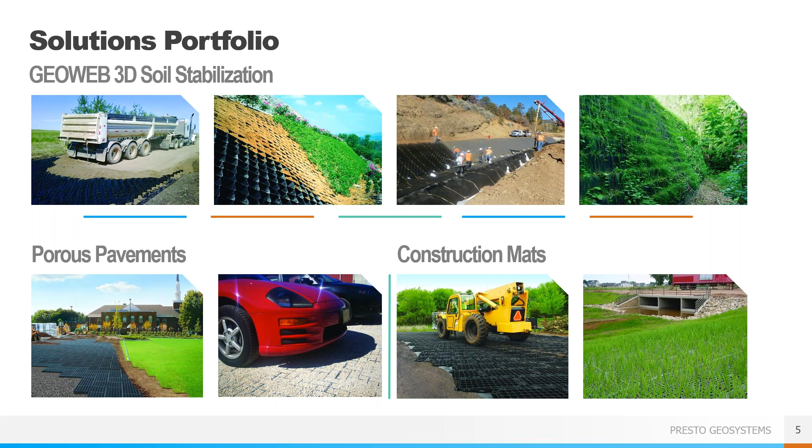An important thing to keep in mind as we go through this webinar: the trails that are made with our products are all considered permeable trails. That is, there's no impermeable paved surface being placed. The final surface is going to be a stone or sand material. This lessens the environmental impact of the trail, reduces the amount of heavy equipment required for installation, often in difficult to reach locations, and improves the overall cost and speed of the project.

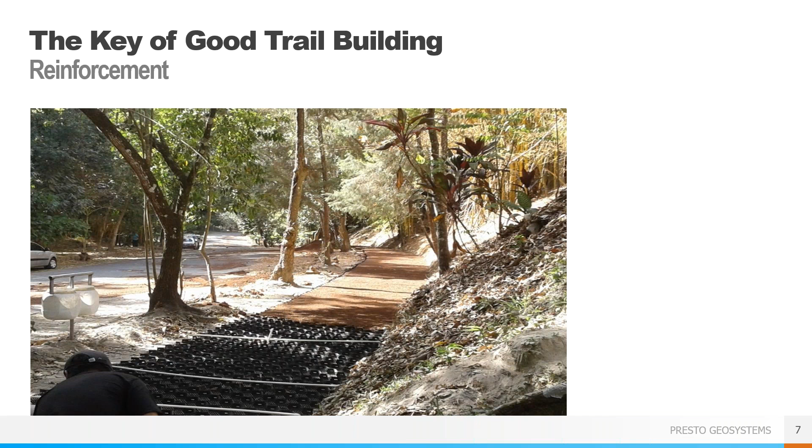We'll begin with what makes a good trail. The first aspect of the design is the reinforcement of the trail area. Especially when the trail moves through sensitive areas, keeping the path intact is how you keep people away from damaging vegetation or getting lost while wandering. The trail needs to be clearly delineated and needs to be reinforced enough to stay in place over time. Using products specially designed to act as the reinforcement of the soil or stone means the trail will last longer and will not encroach on the surrounding environment.

The next key to a well-designed trail is drainage. Ponding water can ruin a trail's surface, and water that runs off the trail into unreinforced areas can scour and damage those areas. As I mentioned, all the products from Presto are considered permeable, and it is precisely for this reason. By keeping the surface permeable, the water infiltrates at the point of contact right when it hits the trail. The water can then permeate down through the product and into the subgrade, entering the groundwater system. The water won't pond at the surface, and it won't run off or collect outside the reinforced areas. This keeps the trail in the same condition, no matter the weather, so there won't be any flaws or failures created below the surface that you can't see.

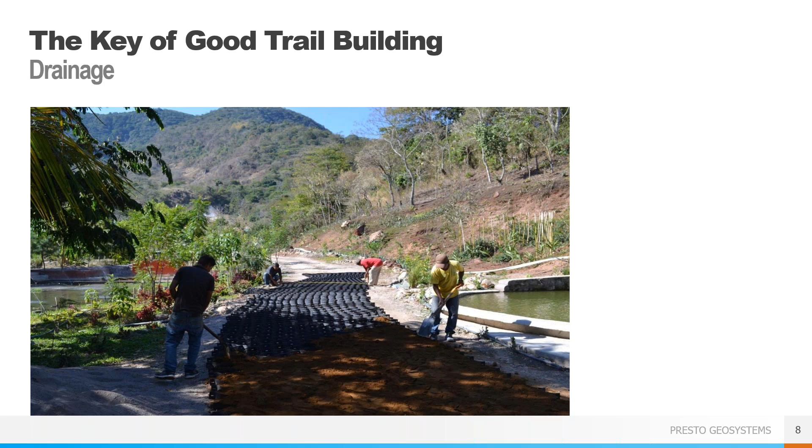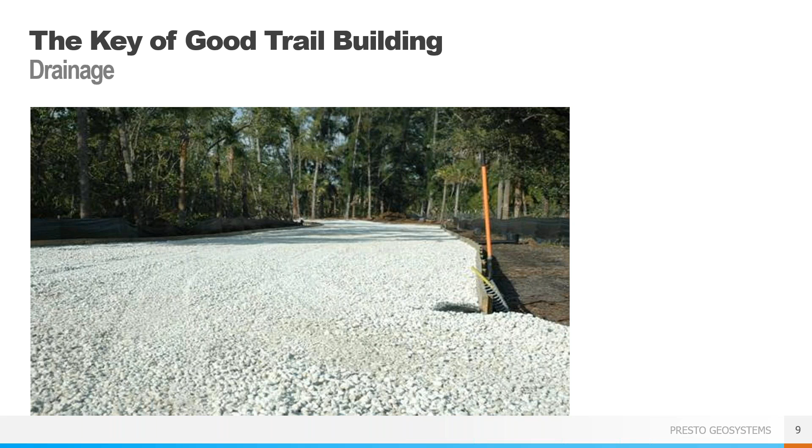The last thing to consider when designing a trail is how to confine the surface. Loose aggregate, stone, or sand is easily moved under shoes, hooves, tires, and water, leading to ruts, holes, and generally damaged trail areas. When the trail surface is damaged, people are going to want to move around the damage, leading them off the trail and into unprotected areas, potentially disturbing sensitive environments. Keeping the surface in place is an important feature of the products from Presto. When the stone or sand is properly held in place, ruts cannot form and the material can't be washed away. This greatly reduces the amount of maintenance required because the trail surfaces aren't degrading.

The first product we'll look at is the GeoWeb three-dimensional soil confinement system. This is a geocell, which may be a term you have heard before. It is similar to a geogrid, but is three-dimensional, so it has depth to provide true confinement and can be used in a wider variety of applications.

The GeoWeb system consists of two main components: cell size and cell depth. The cells come in three sizes, roughly 8 by 10 inches, 11 by 12 inches, and 18 by 20 inches, and heights of 3, 4, 6, 8, and 12 inches. The combination of cell size and depth depends on the project details and loading requirements, but generally trails will use a 4 or 6 inch depth and a small or medium-sized cell.

The seam strength is very important to the function of a geocell. The stronger the seam strength, the better designed the geocell is. A strong seam allows for heavier infill material, steeper and taller slopes, and better lifetime performance. The strength of the panel material, in our case high-density polyethylene, is also critical to the strength and performance of the geocell material.

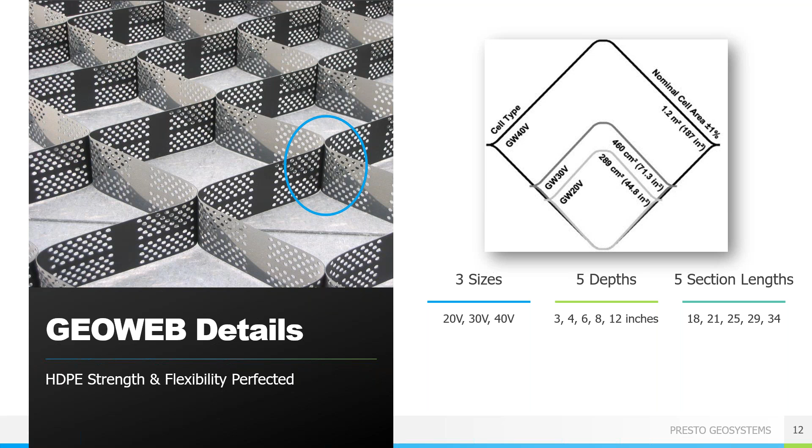Here you can see a typical GeoWeb panel. It comes tri-folded and palletized. Each section has a nominal width of 8.5 feet with lengths up to 58 feet. The panels are flexible, opening like an accordion, so they can follow the natural contours of the work site without being confined to a rigid set of dimensions.

A general note when reviewing product spec sheets for geocells, and any geosynthetic product for that matter: you want to pay close attention to any disclaimer language a product provider tries to sneak into the fine print. Recently, we've noticed a concerning trend where low-end product providers present performance data that appears to equal industry accepted standards on the surface, but then add disclaimer language stating that their specifications are subject to change without notice, or that the information shown is for general purposes and not intended for design. Watch out for this type of trap, especially if a contractor asks you to evaluate a substitute product.

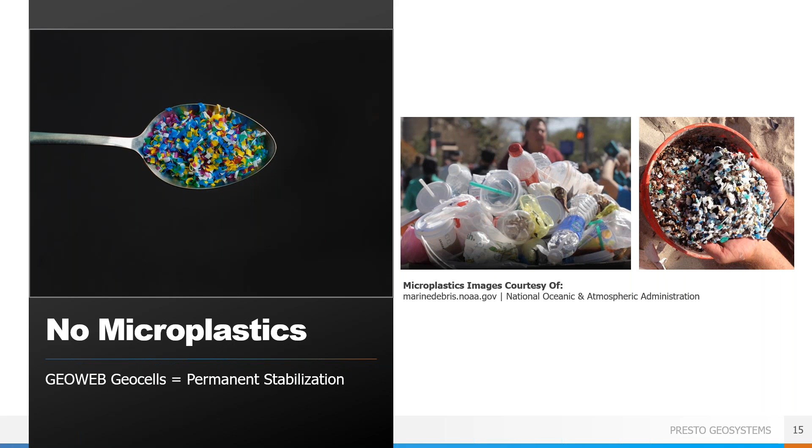GeoWeb is manufactured with premium high-density polyethylene resin with no fillers, polymer alloys, or stabilizers. Our base resin is the same material used in environmental applications, such as geomembranes or other environmental barriers, to protect against the spread of harmful toxins. Our products have been third-party tested by accredited geosynthetics laboratories, confirming long-term stability against environmental factors such as weathering and oxidation.

GeoWeb is predicted to be durable for a minimum of 100 years in natural soil, based on analysis in accordance with ISO 13438, and when subjected to UV radiation and accelerated weathering conditions in accordance with 12224, GeoWeb specimens retained 100% of their original tensile strength with no loss in mass or change in visual appearance.

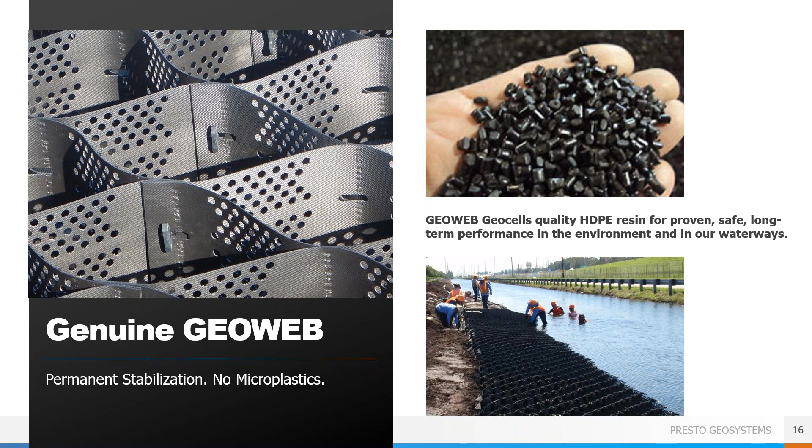GeoWeb and accessories are 100% made in the USA under strict quality assurance and environmental control processes, ensuring compliance with all requirements for Build America, Buy America, and the Infrastructure Investment and Jobs Act.

The GeoWeb system is a three-dimensional cellular confinement system, meaning the panels have individual cells that are filled with an infill material that ultimately makes the final surface of the trail. By confining the infill material, the system distributes loads and prevents rutting, and the cells keep the infill in place so it doesn't wash away from stormwater runoff or move with traffic. The surface of the trail will be stable no matter what infill is chosen, and requires very minimal maintenance for the lifetime of the project.

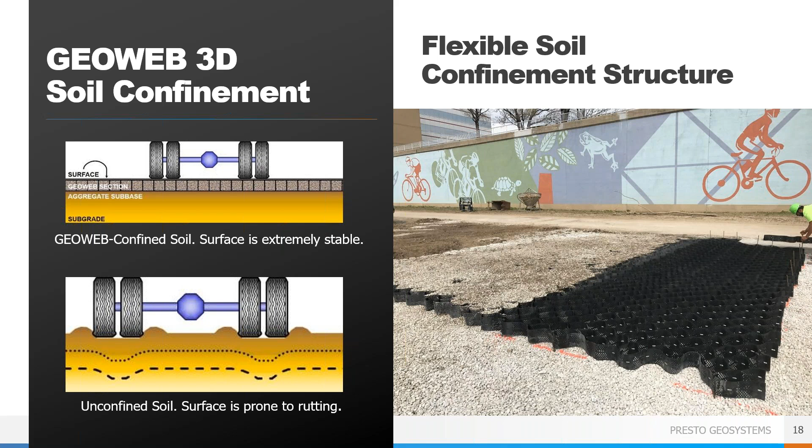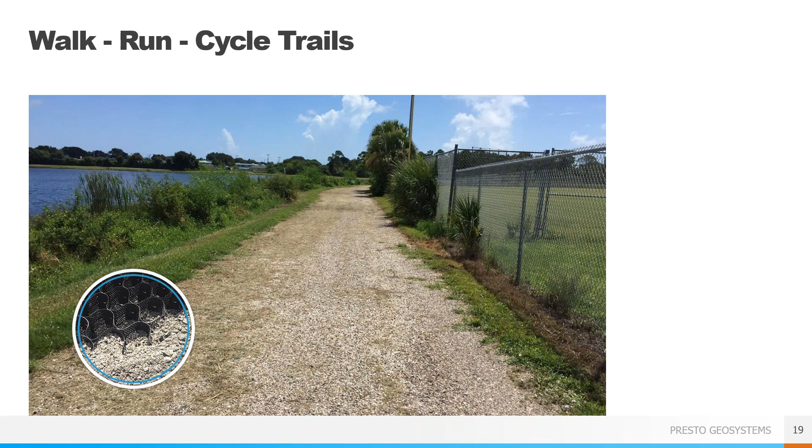Let's look at some different options for building stable trails with the GeoWeb system. Walk, run, cycle trails are meant for people, small animals such as dogs, and bicycles only. This type of trail is not meant for equestrian use.

These are the most common types of trails and can go along shorelines, through urban areas, or through forests or parks. The flexibility of the GeoWeb panels allows for smooth, natural-looking curves.

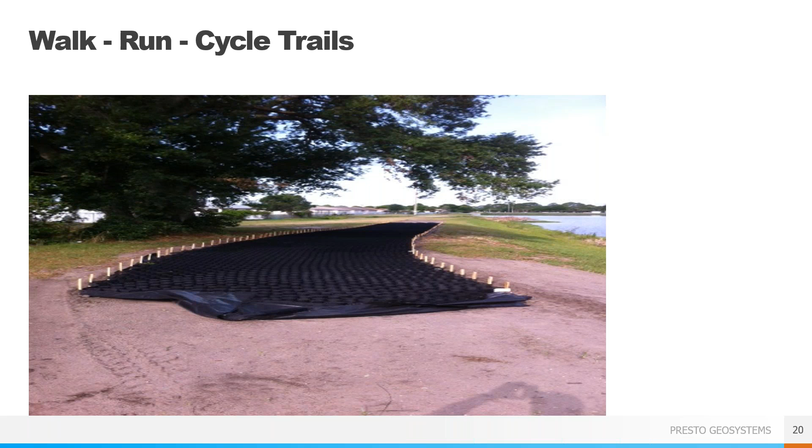The panels can be held open with stakes, as shown here, but those stakes are generally not permanent. They can be removed once the panels are fully filled. The panels can be laid either along the length or width of the trail. They are easily field cut with a saw or landscape shears and are securely attached together. No matter the dimensions, there will be little waste as panels can be pieced together in nearly any configuration.

This path used granite, but any type of stone is going to be acceptable as an infill material, with the only limitations being it should be angular and have a maximum particle size of about 1/3 the cell depth. So you can use what is local to your area without needing to truck in expensive engineered aggregate.

As I said, it's easy to field cut the GeoWeb panels to accommodate the trail dimensions, even rather narrow trails like this one, between a road and protected wetlands. By having the GeoWeb panels create the trail, water runoff from the road won't wash dirt into the wetlands because the water will be able to infiltrate through the permeable GeoWeb surface, keeping the dirt surface in place for a nice jogging path.

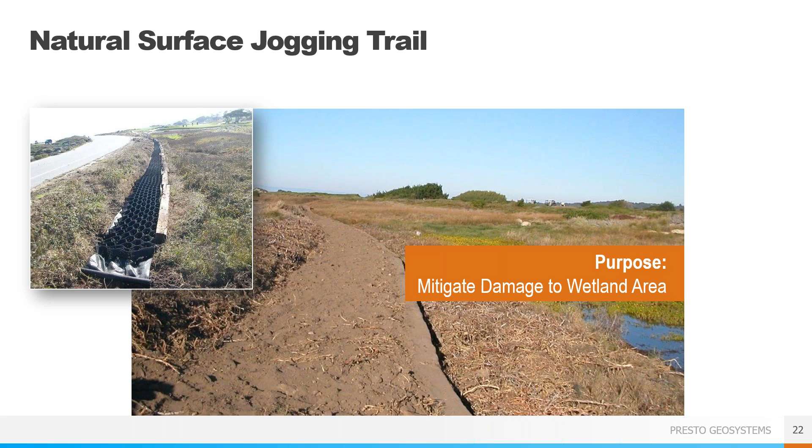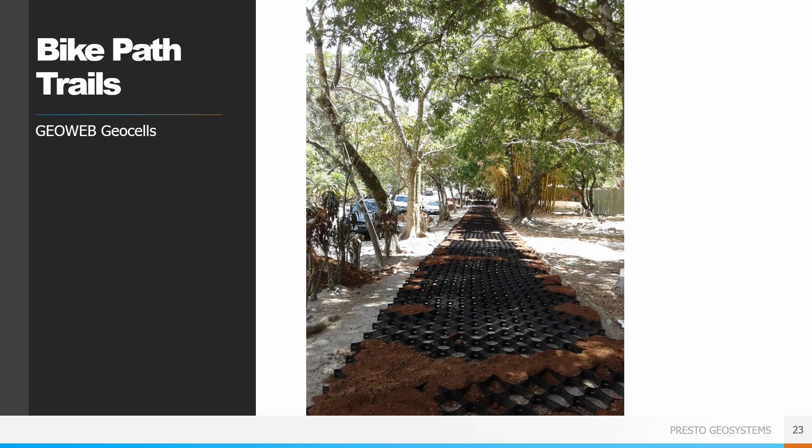Paths through neighborhoods or urban areas can augment or replace traditional sidewalks in places where drainage is a concern. Replacing broken and ugly concrete sidewalks with gravel surface paths allows for flexibility in design and aesthetic, and will improve the safety of the walkway for pedestrians. These types of trails are good for any typical sidewalk traffic, but can also be designed to support cars or trucks.

A 3 or 4 man crew can install about 1,500 square feet of GeoWeb panels per hour, including laying a geotextile fabric and infilling the panels. The geotextile helps to create a separation layer between the natural subgrade and the infill material, which is especially important in areas of very soft subgrade, such as a wet clay.

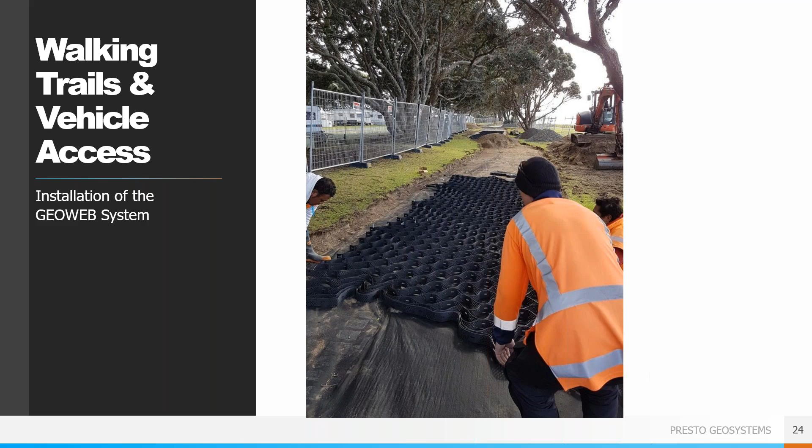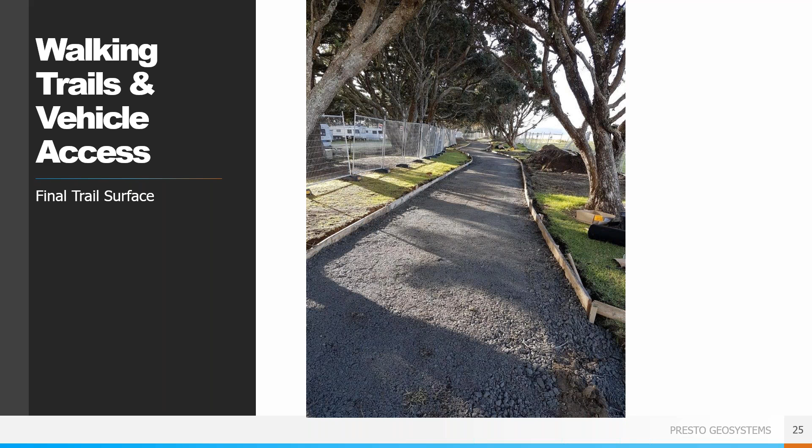We recommend overfilling the GeoWeb panels slightly when installing so that there is a wear surface over the panels and the plastic is not visible. This surface will become naturally compacted over time based on the trail usage. Having the panels slightly overfilled helps protect the GeoWeb material from vehicle tires or other potential damage.

Equestrian trails are next, and they have some different requirements when compared to walking paths. Equestrian trails have to be hardy enough to stand up to horseshoes while remaining smooth enough to avoid damaging their hooves. Horseshoes can pick up a surprising amount of dirt with each step, and with their heavy concentrated point loading can cause quick deterioration of the trail.

If the trail is designed to withstand horse traffic, it is more than sufficient to handle hiking, biking, and small motorized vehicles.

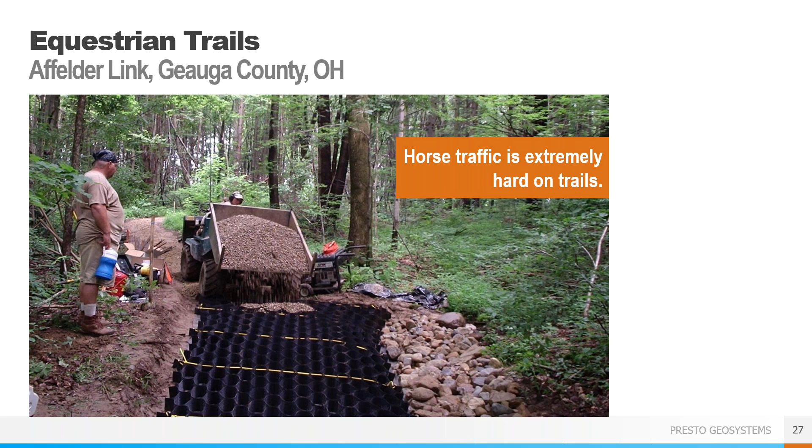A GeoWeb trail system was utilized for erosion control for these equestrian trails. The gravel surface is resistant to rutting, and the 1-inch stone size is easy for the horses to walk over. This aggregate path will not get muddy or create sinkholes, so the surface will remain ready for use even after rain or heavy use.

Having a well-defined path also helps prevent damage to areas off of the trail, and using the GeoWeb system allows for the inclusion of natural markers such as the large boulders we see here on both sides of the system.

Now we're going to walk through a case study for a shoreline trail in the Colony, Texas. This project was a multi-use trail along the shoreline of a lake. The trail will see pedestrians, bikes, small vehicles, and potentially equestrian traffic. The client, the city of the Colony, wanted to follow the natural contours of the shoreline, which the flexible GeoWeb panels can easily handle.

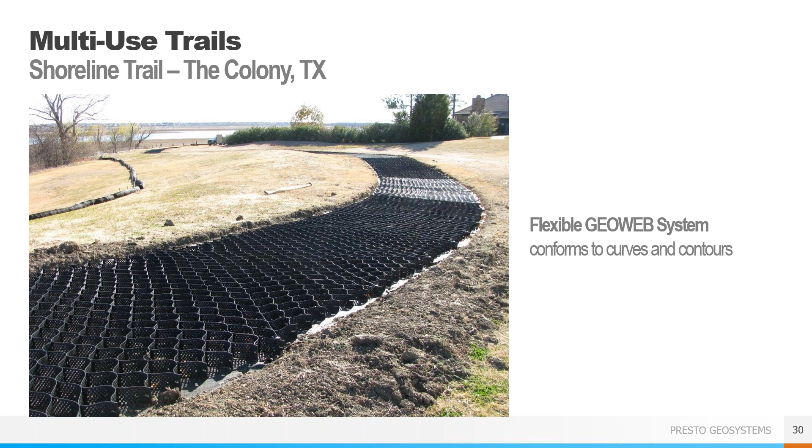There was concern about the potential for uplift under the system due to the very high water table and lake level fluctuations, so additional steps were taken to prevent this from occurring.

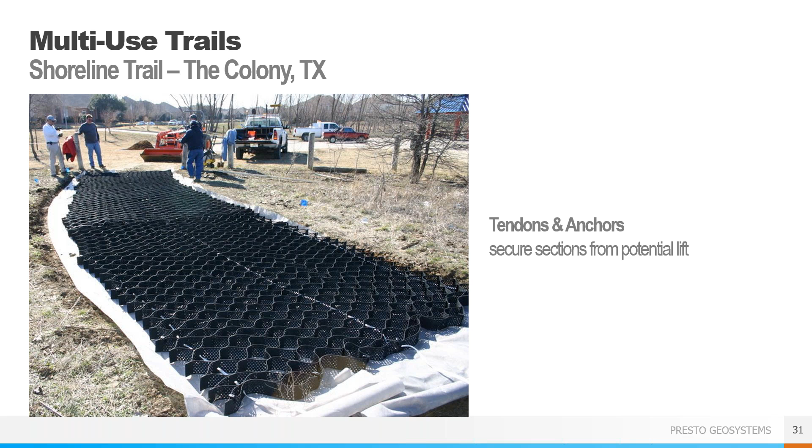A series of polyester tendons were run through the GeoWeb panels and were anchored multiple times per panel. The tendons, in conjunction with the final infill stone material, prevent the GeoWeb system from lifting and deforming due to groundwater pressures. This is good practice in wet environments with potentially saturated soils.

A well-graded decomposed granite was chosen as the infill material as it was readily available in the area. Using local materials is encouraged, though any type of stone is acceptable as long as it is angular and allows good drainage. This means you want stone with limited fines so water can percolate through. If the water can't infiltrate, you will get ponding at the surface, similar to a paved surface such as asphalt.

So you want to make sure your infill material avoids this problem. Keep in mind that this material is going to be your final surface, so aesthetics may be a factor in choosing the material.

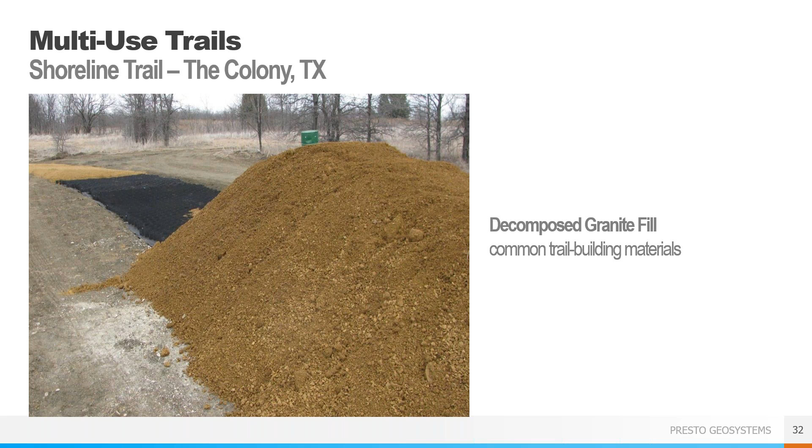Once the GeoWeb panels were installed, the infill was placed with a standard front end loader and then raked by hand to ensure all the cells were fully filled. The material should be placed on the outside of the panels as needed to match the final grade and meet up with the unexcavated areas.

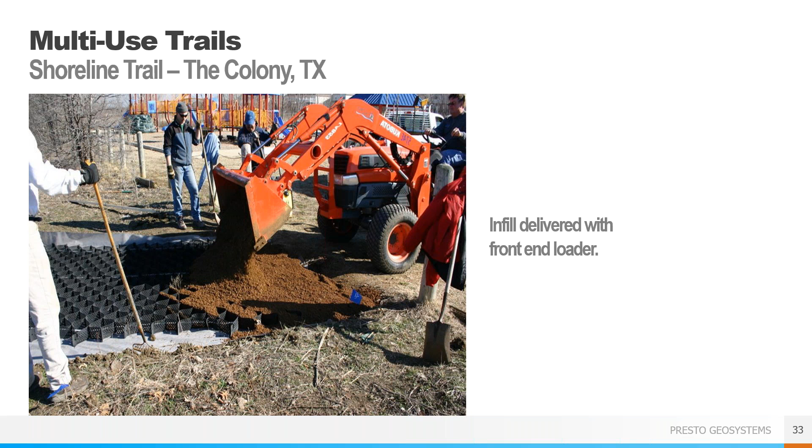For ease of construction, you can drive your vehicles and equipment on the GeoWeb panels as soon as they are filled, right up to the limits of the filled area if necessary. So you don't have to wait for the entire system to be filled before using it. This can help minimize the impact of construction on the area since you won't need to create access lanes or clear out excess vegetation on the sides.

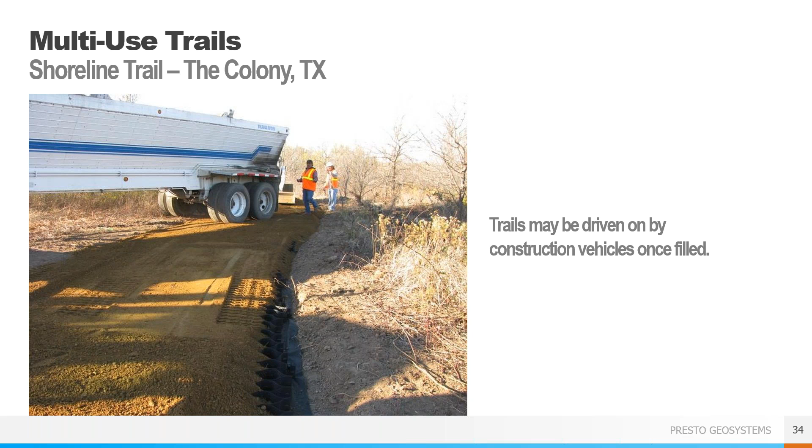Again, the stone infill should have minimal fines, generally less than 10%. Avoiding fines in your stone allows the system to stay permeable and not get clogged.

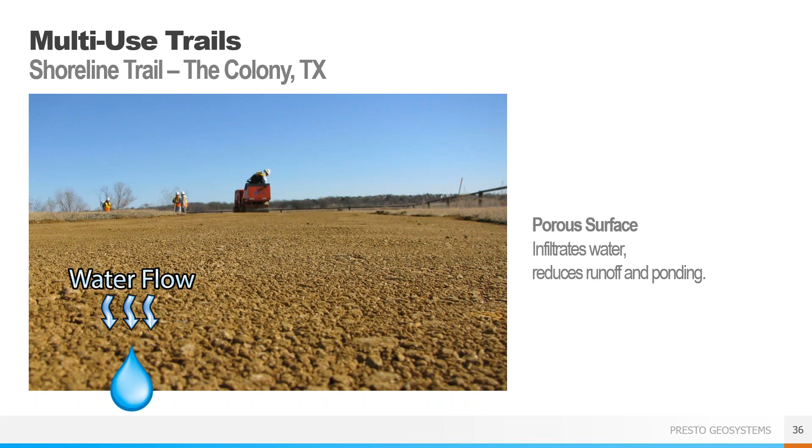Trails built with the GeoWeb system are a great example of green infrastructure by not disrupting the water cycle or impacting the groundwater flow. No additional stormwater infrastructure is needed when the trail surface is permeable, so there is minimal impact on the environment around the trail.

Here we can see the nice clean trail created using GeoWeb, allowing for most uses without having to worry about needing constant maintenance. The path is clearly delineated while maintaining a natural look that people won't mind seeing in their backyards.

A few months after installation, there was a large rainfall event, over 7 inches in a 3-hour period, which can be incredibly damaging both during and after the storm.

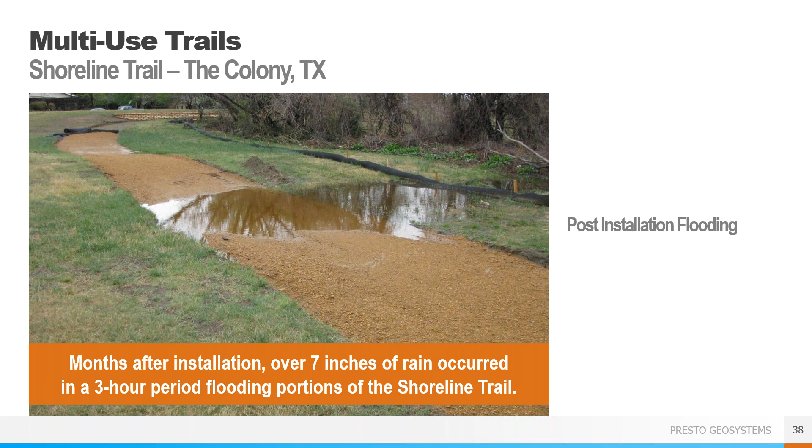Several portions of the trail were flooded to the point of standing water at the surface on and around the GeoWeb protected areas. But thanks to the GeoWeb system and extra precautions such as the tendon system, the trail was not washed away as you might expect from an unprotected gravel trail.

The trail was still usable, allowing maintenance workers access to the damaged areas for inspection and repair. No repair was needed to the GeoWeb system, and once the water was able to infiltrate, the trail was as good as new.

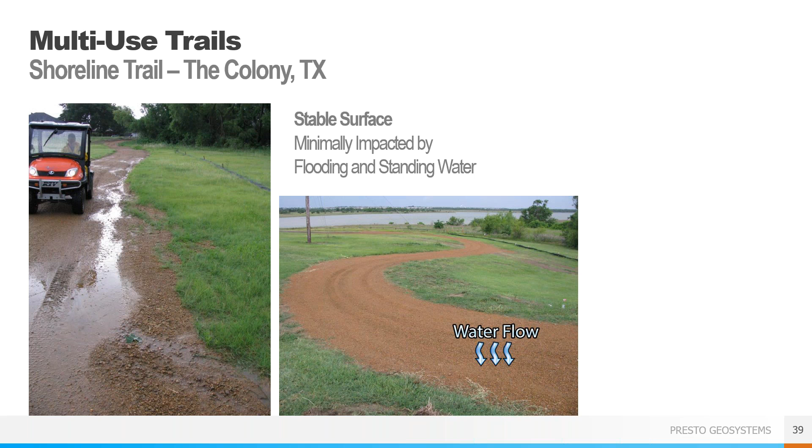When there is such a large rainfall event, the ground becomes saturated and doesn't allow water to infiltrate, giving it no choice but to stay at the surface and become sheet runoff.

The GeoWeb system protects the trail surface against erosion when this happens, with the cell walls functioning as a series of check dams, keeping the infill confined within the individual cells. Then, when it is able, the water can infiltrate into the ground and the trail is still in good shape.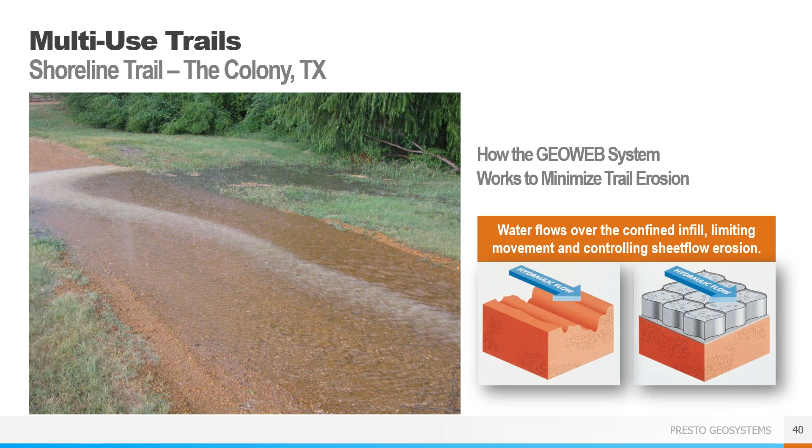In the spring of 2018, several storms violently swept through the areas along southern Maine's coastline, devastating the beaches and trails of Fort Foster, a town-owned park in Maine. As you can see from these photos, the trails and maintenance roads were washed out.

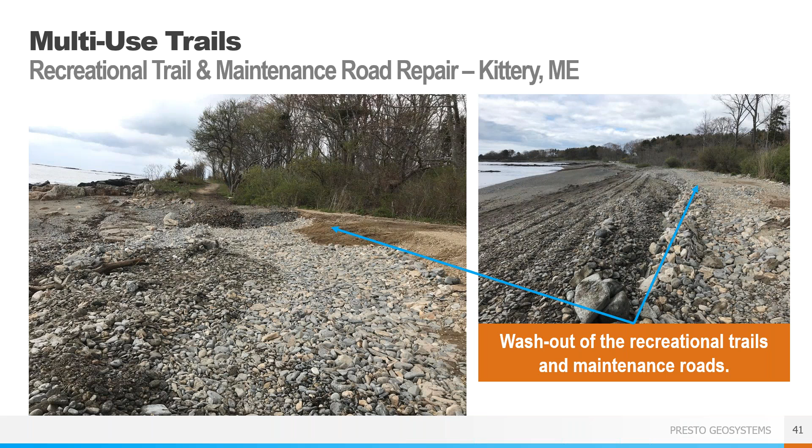To reconstruct the washed out recreational trail and maintenance road, 6-inch depth GeoWeb panels were installed at the site and infilled with 1-inch crushed aggregate.

There were sections of the trails that sloped down to the beach areas. To stabilize the 2-to-1 sloped areas down to the beaches, 4-inch depth GeoWeb sections were secured to the face of the slope using dead man tendons and ATRA tendon clips.

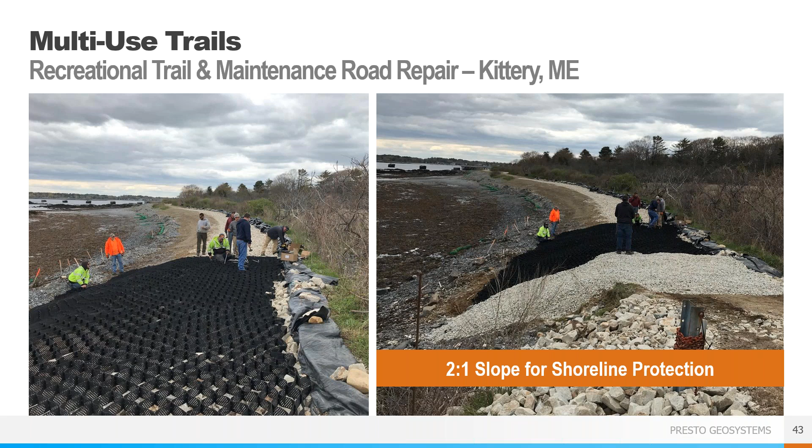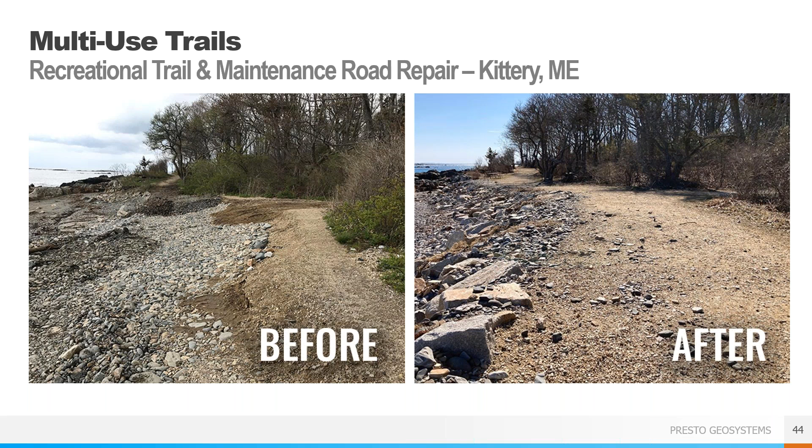Then the GeoWeb was filled with aggregate and covered with large riprap. By using the GeoWeb system, the park was able to armor the maintenance road, recreational trail, and slopes from future storm events. Here's a before and after photo of one of the trails.

Since its original installation in 2018, the GeoWeb load support and shoreline protection system continues to perform as designed, allowing the community to once again enjoy the trail system and local beaches.

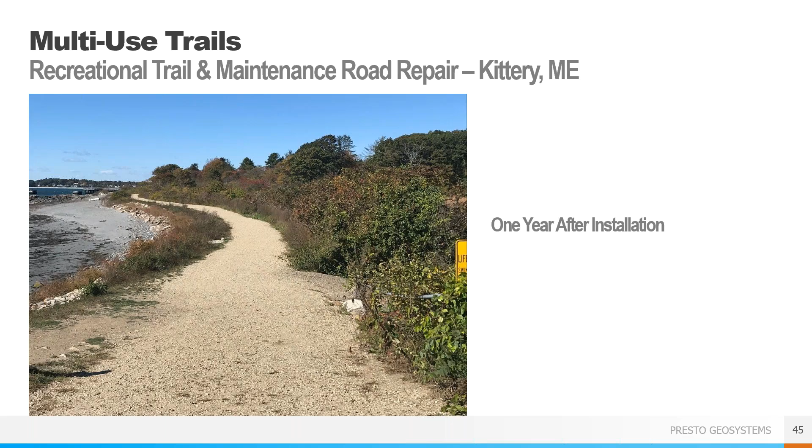The existing causeway, which was used as a walking and biking trail across Lake Champlain, was blown out due to storms and had to be closed.

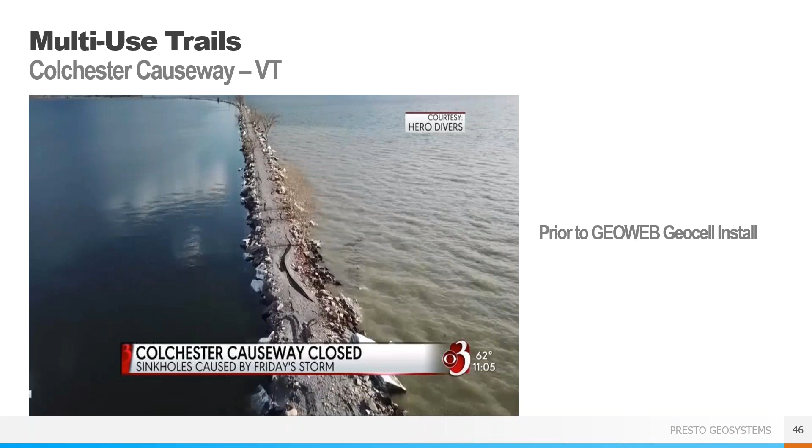Our local distributor worked with the town and submitted a request for project evaluation through our website. Here you can see Presto's recommendation of the mid-size cell, 4 inches deep.

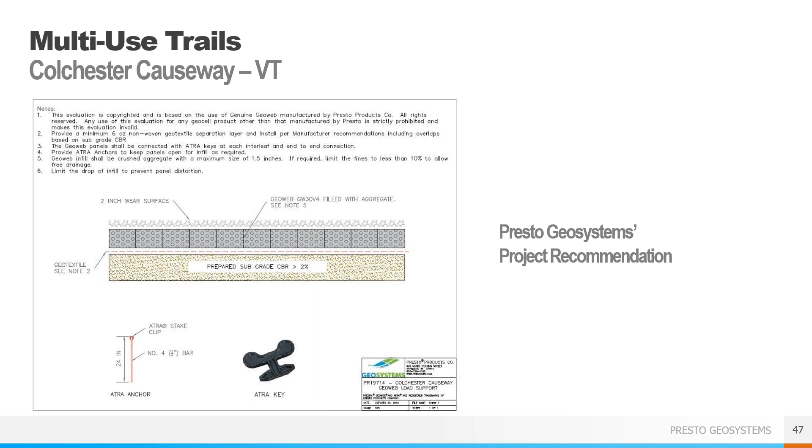Installation of the GeoWeb took place in November of 2019, and the trail is holding up well after several significant storm events.

One of the biggest questions we get is about cost, which isn't really surprising, especially if this is a new technology for you or your area. Having an idea of how much the GeoWeb system costs compared with other stabilization techniques is very important.

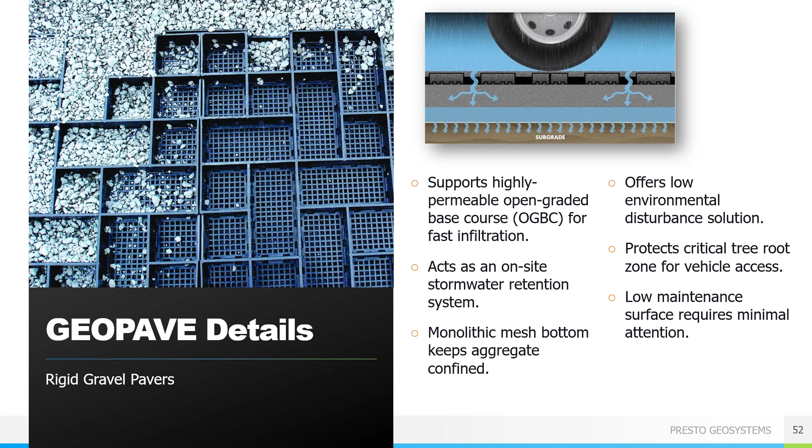We'll now look at a few project examples. This first one is an access trail for walking down to a swimming area on a lake. The walkway had to be ADA compliant so that everyone could use it.

It was also important that the trail help reduce runoff into the lake, so the permeable nature of the GeoPave system was critical.

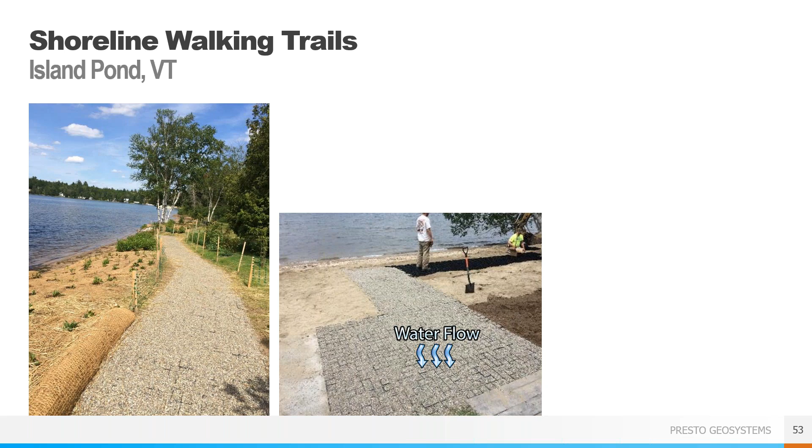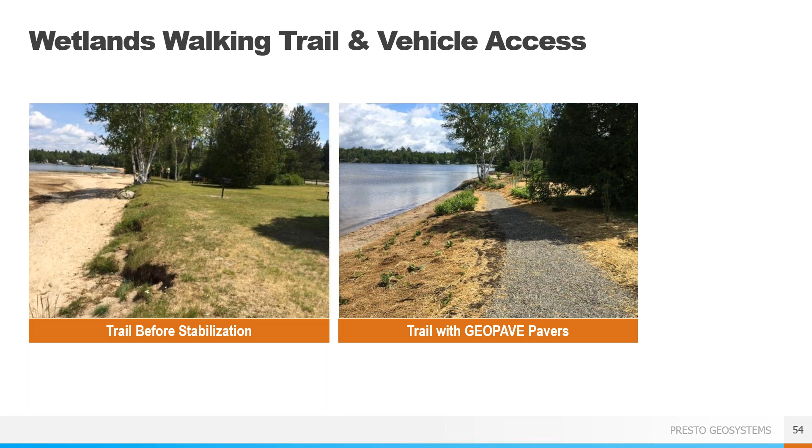This is another trail in a wetlands area. Here, the GeoPave units were placed directly on the subgrade, but a geotextile separator fabric and a base layer of aggregate underneath the panels can be incorporated to support heavier loads or add additional detention. No matter the section, the entire system creates a flat, stable surface and supports the anticipated loads.

The same principles that we discussed with the GeoWeb system apply here as well. By using an open graded aggregate stone with minimal fines content, the water can infiltrate at the point of contact, reducing surface runoff, and the individual cells confine the aggregate, preventing rutting and washout of the stone for a stable walking surface.

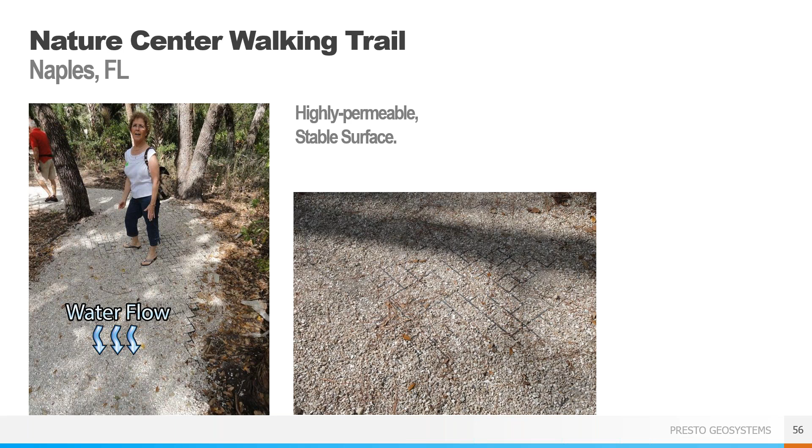A major concern here was protecting sensitive tree roots from impact damage. The GeoPave units are a great way to provide tree root protection by creating a bridge over the roots, so there is no direct contact from vehicle or pedestrian loads that could harm the trees. This bridge lasts the lifetime of the GeoPave trail and allows the trees to grow unimpeded.

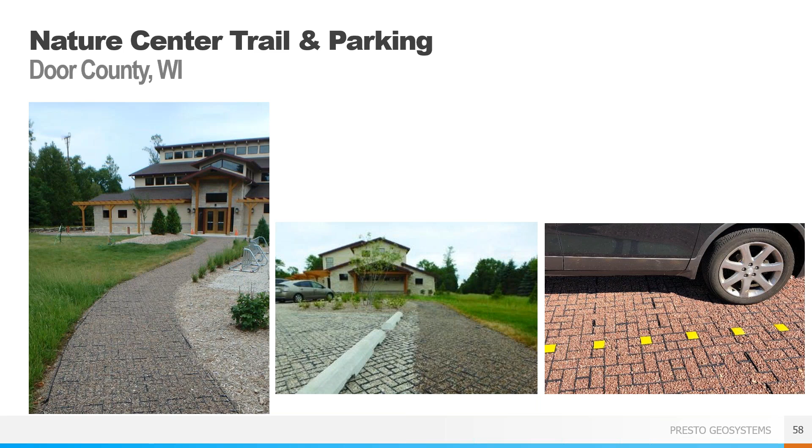The project ultimately earned LEED Gold for all of the low impact structure and landscape elements. Protecting the local watershed was the primary reason for including permeable parking and walkways utilizing the GeoPave system. These pavements also perform as natural on-site stormwater detention, storing water in the base for natural percolation without the need for a large isolated detention pond, which would have been an unattractive nuisance on site.

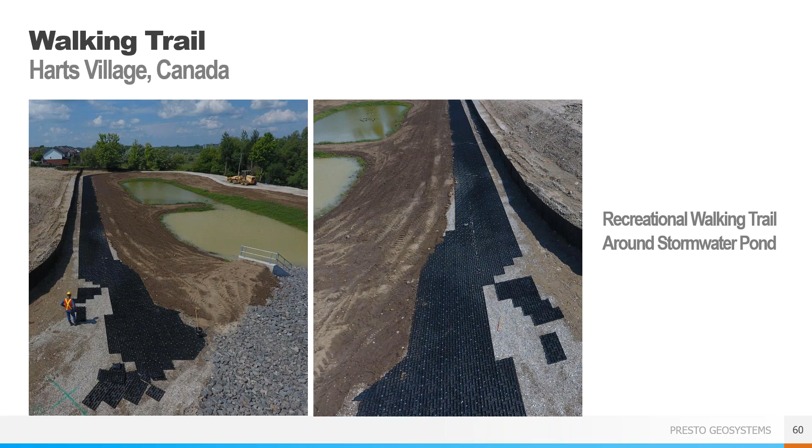The GeoPave units come in 20 by 40 inch panels, covering about 5.4 square feet, but they can easily be field cut or staggered to accommodate curves, so you are not locked into a linear path. The system was a great choice for this project, with quick and easy installation, the ability to allow water to flow through the system and not run off into the pond, and providing a smooth, clean surface for walking.

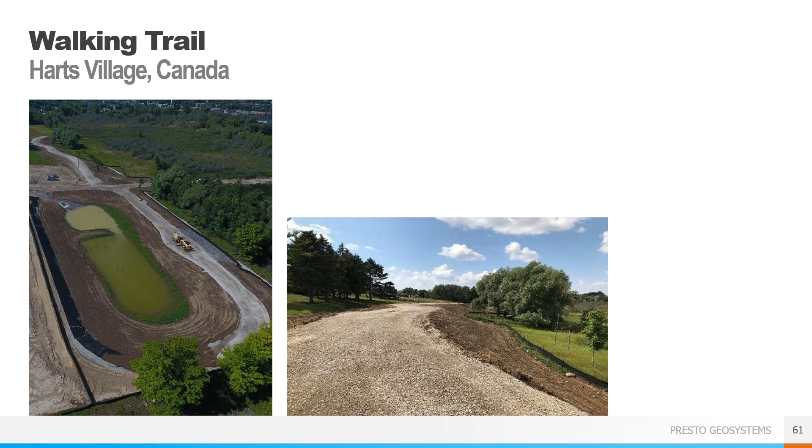Standard GeoPave units are black, but a tan GeoPave is an option that allows natural blending with light colored stone. Again, the options available for the final design of the trails are what make using this system so versatile and a great choice for any project.

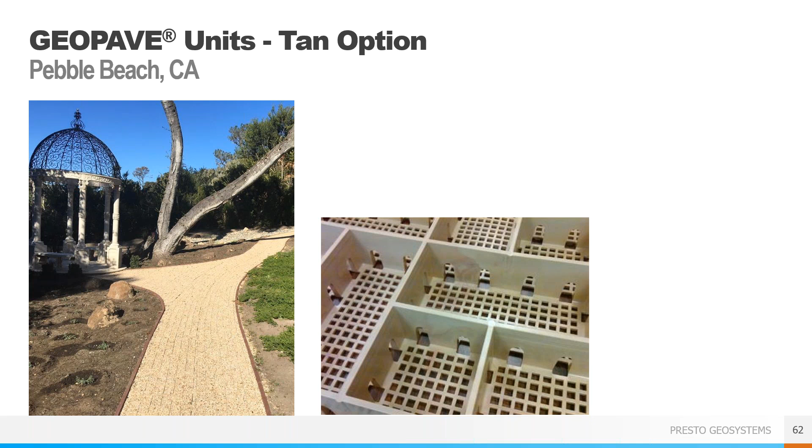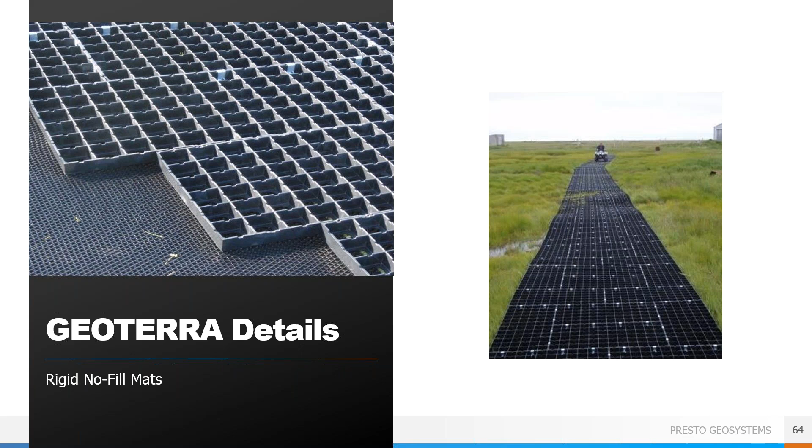The last option for trail surfaces is the GeoTerra system, which are construction mats that are strong yet lightweight and don't require any fill. Because no fill is required, they are perfect for areas where infill resources are scarce. Because there is no fill material, GeoTerra trails won't kill the existing vegetation they are placed over. They are open on the top and bottom and allow for vegetation to grow through them for as long as they are in place, which is essential for minimizing environmental impacts for pathways.

GeoTerra units cover approximately 5 square feet each and can be connected to cover a larger area as needed. The mats are strong enough to support heavy vehicle and construction traffic loads and have enough flexural strength to bridge soft soils without warping or cracking.

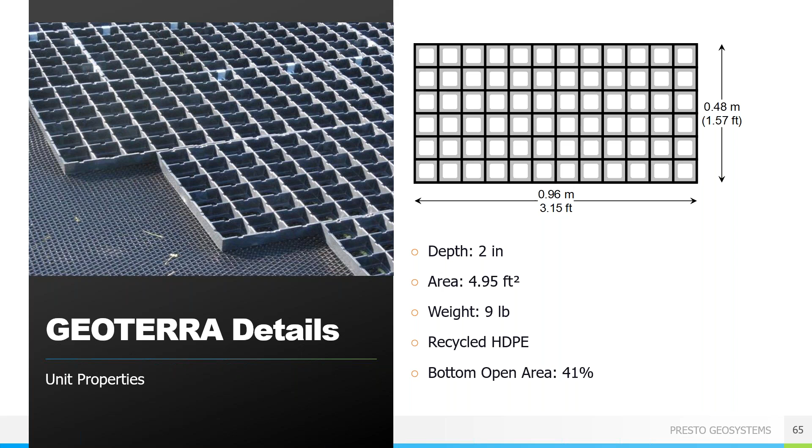The GeoTerra units are connected with strong metal connectors to essentially form a floating road through wetlands with very soft soils. The connected mat system distributes loading across the pavement, minimizing potential for rutting or sinking in soft, muddy soils.

In some areas of Alaska, hundreds of miles of ATV trails cut across wetlands and stream beds, causing extensive damage to natural preserves. ATV riders can cause the loss of vegetated cover and habitat values. GeoTerra mats offer a great solution for low impact access in these wet and environmentally sensitive areas.

The preferred method is to place the units across the entire trail width, but in some cases, just placing them in the wheel paths is acceptable.

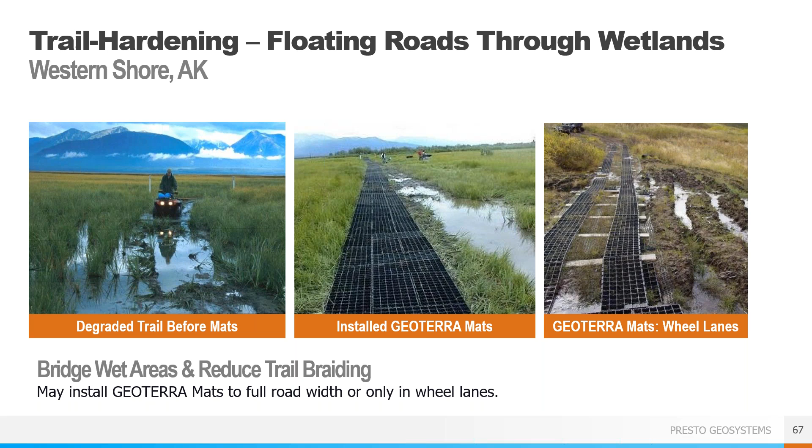As planned, indigenous grasses regenerated through the permeable open cell GeoTerra mats, ultimately semi-camouflaging the product with the natural environment and protecting the vegetation from damage. In this case, the system ultimately ended up as a permanent structure, and the GeoTerra mats will be able to last for as long as needed.

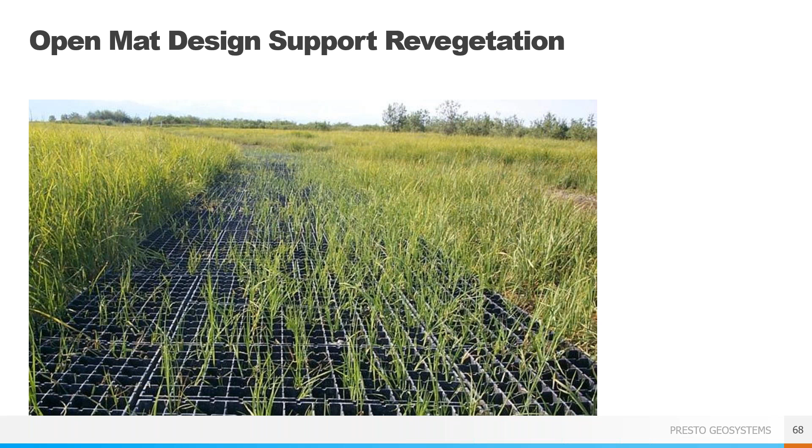The last section is now going to pivot from the flat surface of the trail to the embankments that may be alongside or near a trail. Green walls can help create the space for trails to run through and work with permeable trails to allow water flow and promote vegetation.

The same GeoWeb GeoCell technology that creates the trail surface can also be adapted to create retaining walls, such as this vegetated levee. The GeoWeb panels are stacked vertically, one on top of another, to create the wall, allowing for more horizontal space for the trail to be placed.

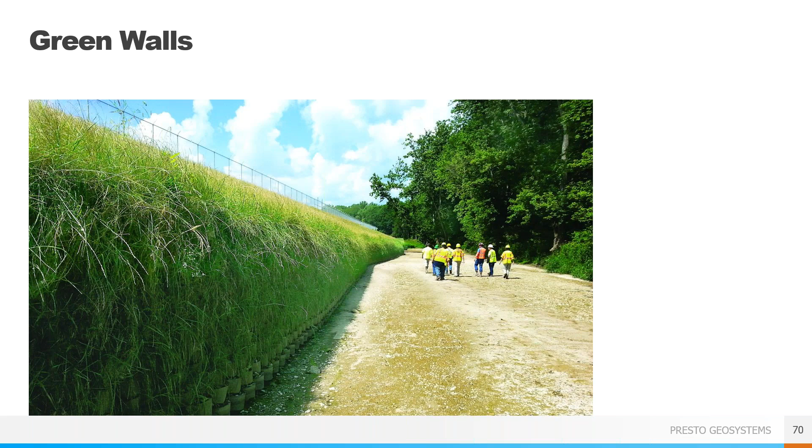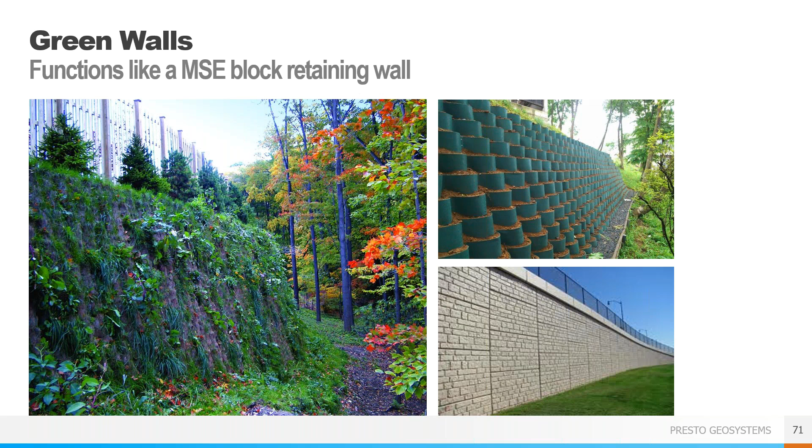The primary benefit of the GeoWeb wall is to create a stable, natural living structure with vegetation for aesthetic appeal. The open front face allows rainwater to infiltrate. The wall structure can also absorb some runoff from the top of the wall, such as from walking trails.

While vegetated walls are most common, aggregate-filled walls are also possible. Using the same open graded aggregate we have been talking about, water can infiltrate through the wall, so there isn't runoff onto your road or trail. An aggregate wall may be useful when you don't want to worry about maintaining vegetation in an area, such as an emergency response space or in areas where vegetation is difficult to establish.

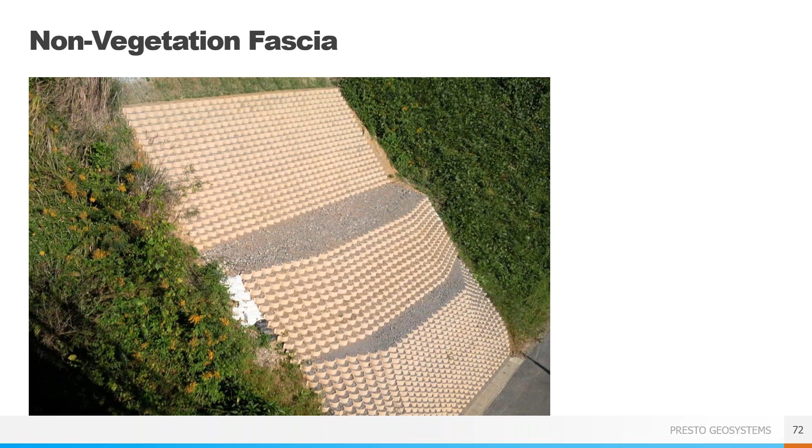The walls are designed as either gravity or reinforced walls in the same way as mechanically stabilized earth, or MSE, wall systems. An advantage they have over MSE block walls is flexibility in poor soil conditions. Their relatively lightweight and flexible nature allows them to tolerate reasonable differential settlement very well. Another advantage over traditional walls, such as gabion basket walls, is the relatively shallow embedment depth of the wall and the ability to create a very steep wall face, as steep as 80 degrees.

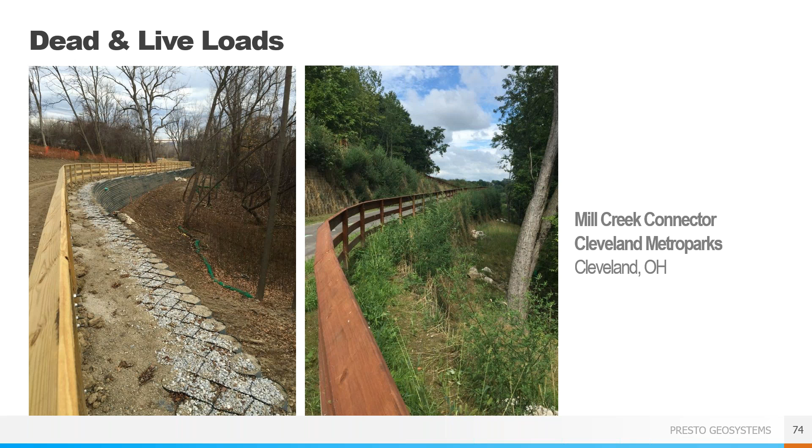We'll now look at a vegetated retaining wall case study. This project was faced with having to retain soils in a very problematic soft soil area, but piling systems were expensive and they wanted to maintain the natural environment.

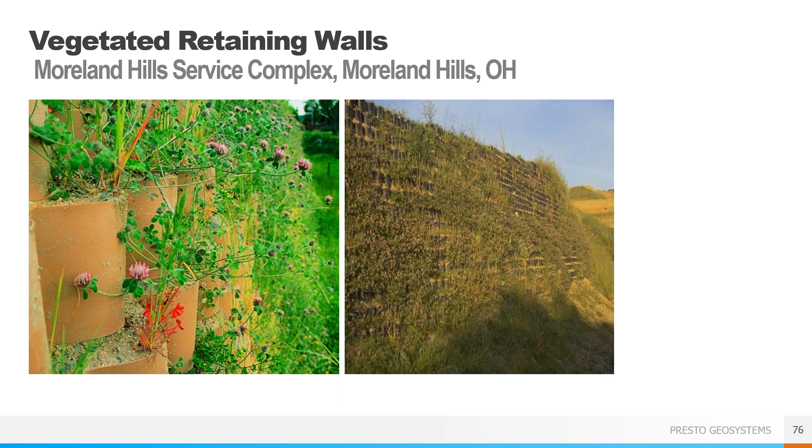Concrete and modular block walls were considered, but ultimately they chose the vegetated geocell wall for its natural aesthetics and lower cost. Here you can see the wall structure is constructed with a slight setback to allow for topsoil fill and vegetation. The backfill material is a good drainable aggregate. The wall can be seeded either by mixing the seeds in the soil before installation or by hydroseeding or broadcasting once installation is complete.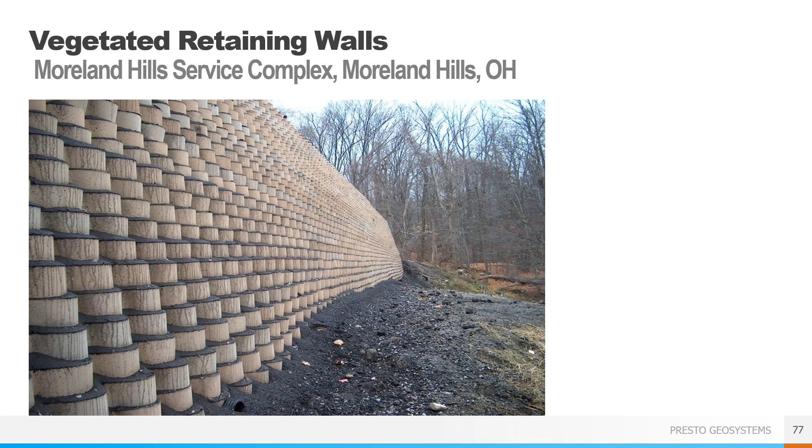As mentioned, the system's inherent ability to withstand some differential settlement in soft soil environments was extremely important at this site. The wall had varying heights along its length, which was also easily accommodated with the GeoCell system. By using the GeoCell wall, they didn't have to bring in invasive equipment such as augers or H-piles, speeding the installation process.

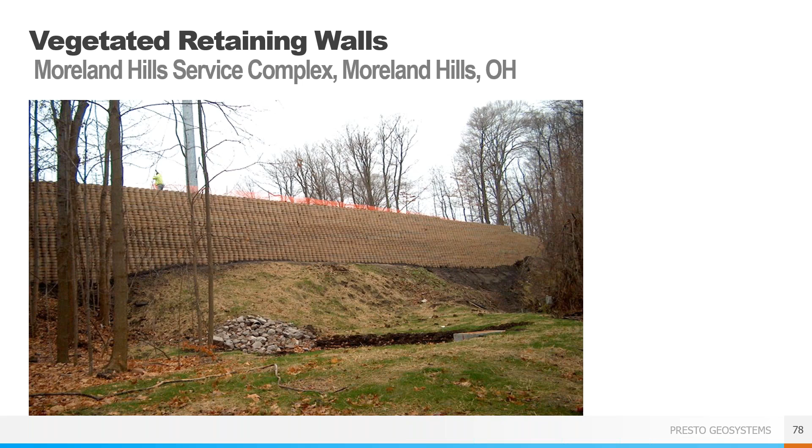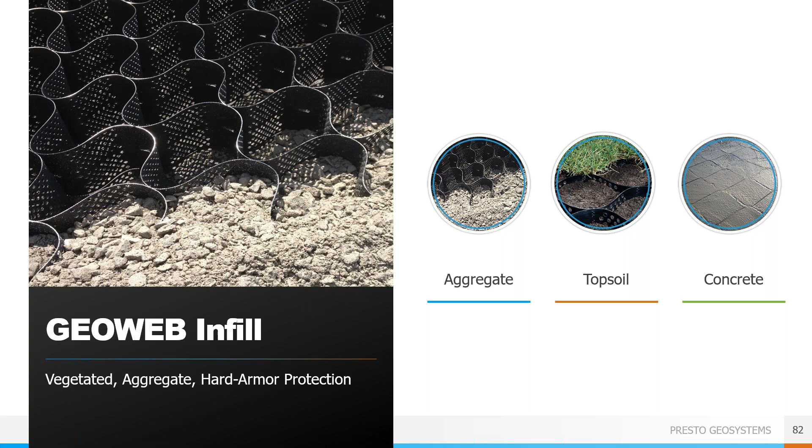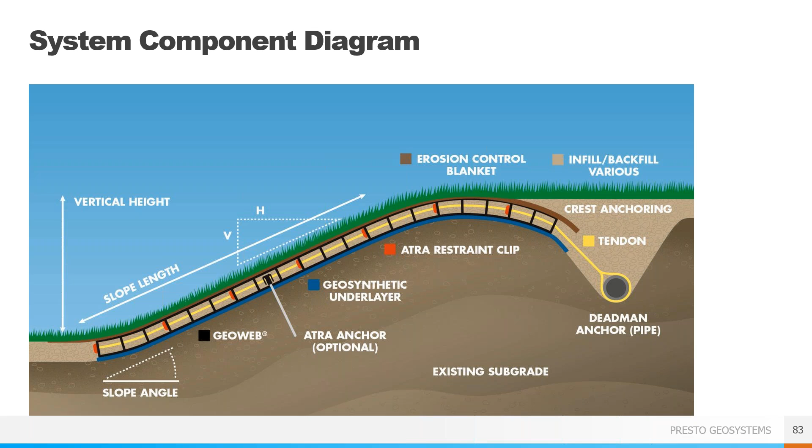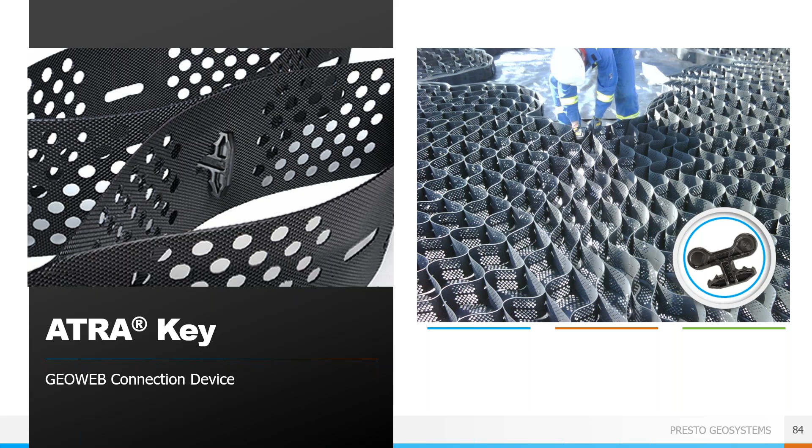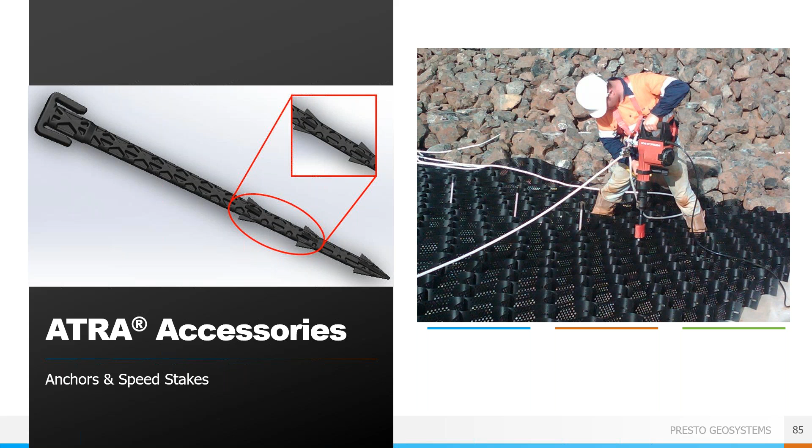If corrosion resistance is required due to project conditions, Presto has a high-density polyethylene ATRA speed stake that is designed to work with the GeoWeb panels.

Every accessory and every feature has been designed and tested to specifically work together so that we go from problem to design to construction solution with a system where the modeling replicates real-world forces.

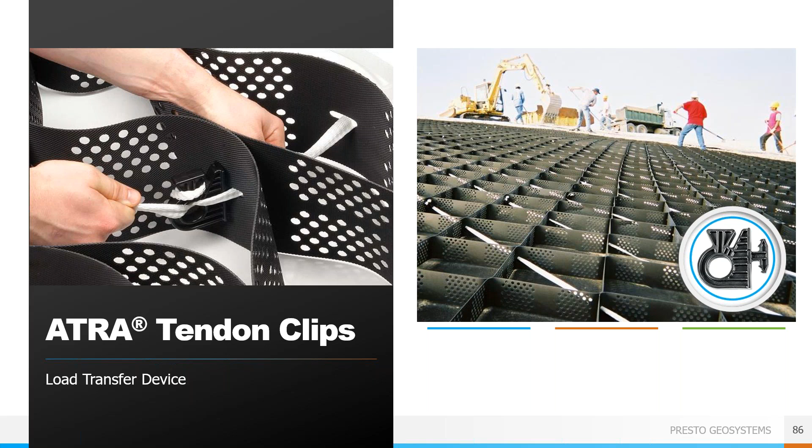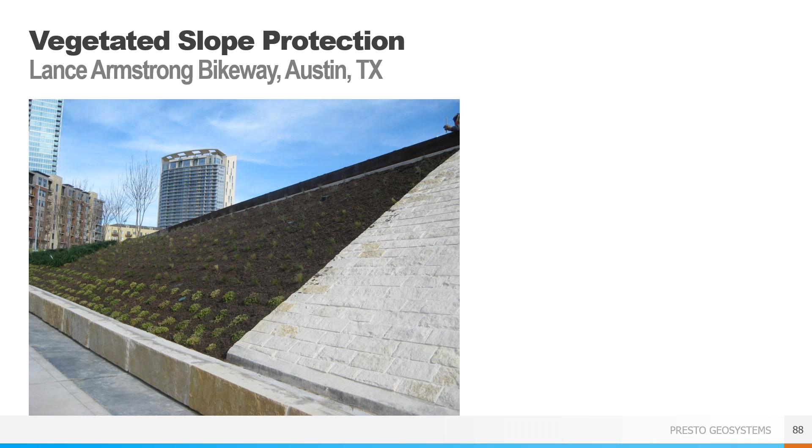In summary, Presto Geosystems offers GeoWeb, GeoPave, and GeoTerra that can meet any trail design needs, as well as GeoWeb for earth retention and slope protection near trails. Each product is designed to protect the surrounding environment while offering a low maintenance surface that won't wash away during heavy rain events. We offer a complete solution, including connections and anchoring options.

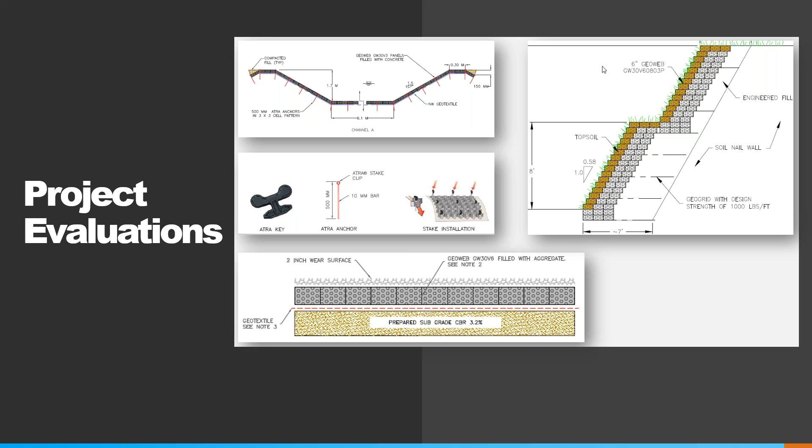Part of our complete solution is our technical assistance. As I mentioned earlier, we provide free project evaluations. The form is on our website, which again is prestogeo.com. You fill it out with as much information as you have, including attaching documents such as geotechnical reports, and then it will come to our engineering department. Within 3 business days, but usually faster, we will provide a complete evaluation, including infill recommendations and anchorage requirements. We will work with you to get you the best design for your project.